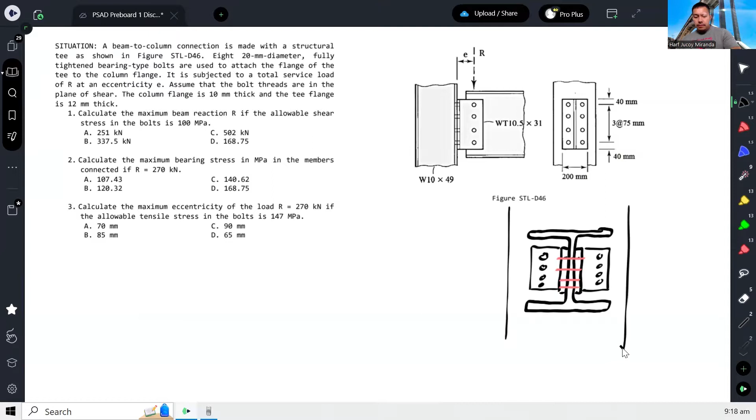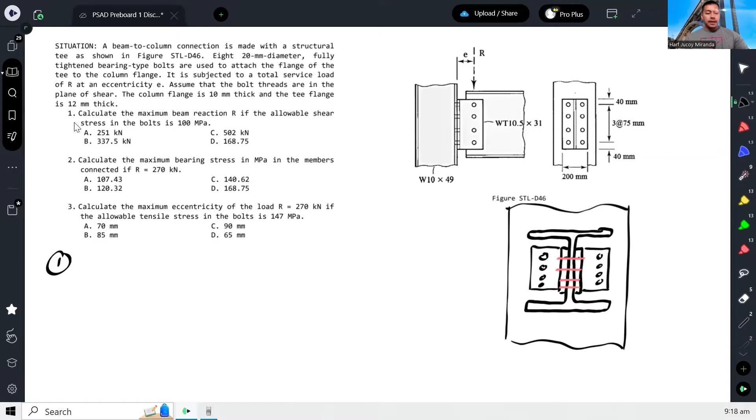Okay, so for number 1, calculate the maximum beam reaction R if the allowable shear stress in the bolts is 100 megapascal. So isn't shear stress equal to shear force over area? Okay, so in this case, because the applied reaction R is parallel to the direction of the bolts, it will just be R over A.

Our A is the area of the bolts, total area of the bolts. So in this case, we have 8 bolts. So 8 times pi over 4 times diameter 20 squared. Okay, so that's the diameter.

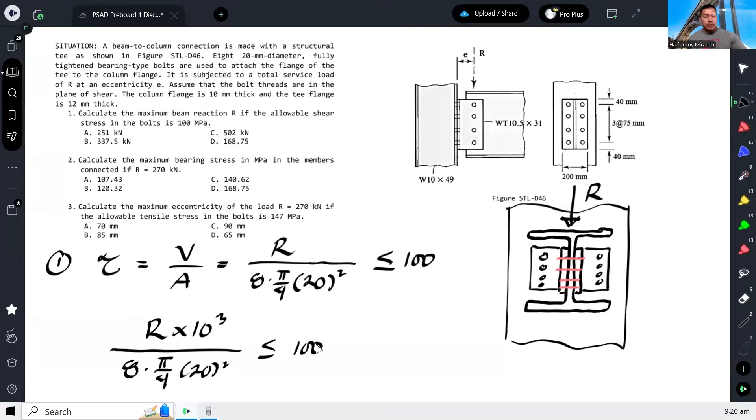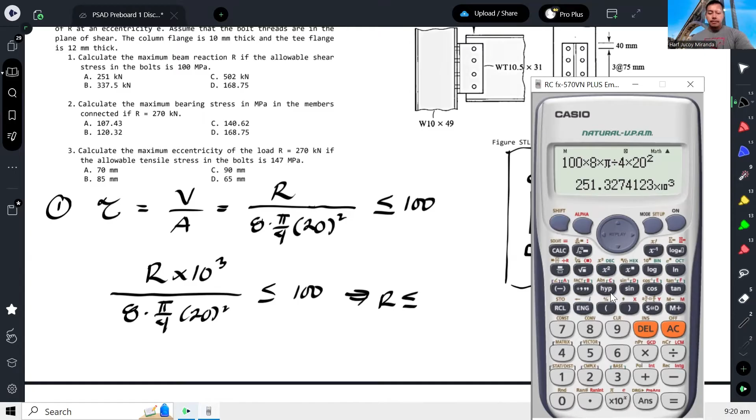Okay, so therefore, this should not exceed the allowable 100. So therefore, our R, we convert to Newtons assuming kilonewtons. And then we have 8 times pi over 4 times 20 squared should not exceed 100. So therefore, our R should not exceed... dividing by 1,000, we get 251.33. And that would be our answer here.

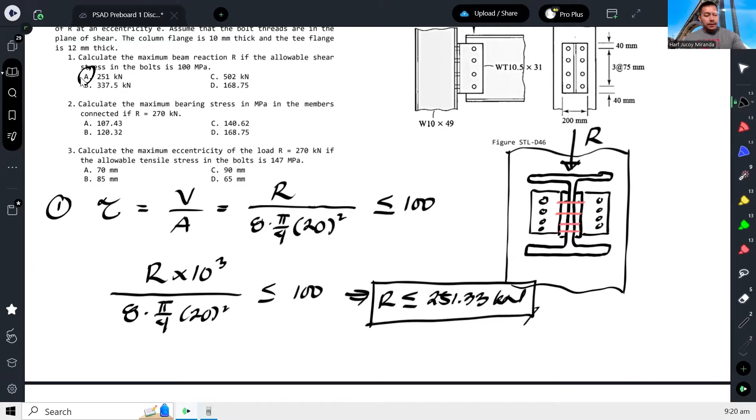Okay, next, calculate the maximum bearing stress in the members connected if R is equal to 270. So maximum bearing now. Okay, so bearing stress.

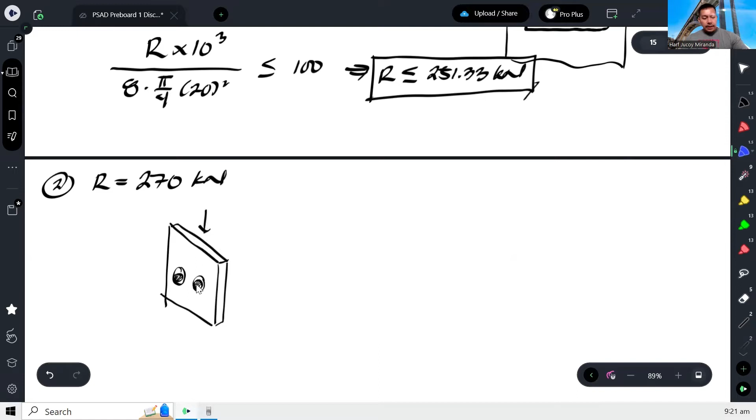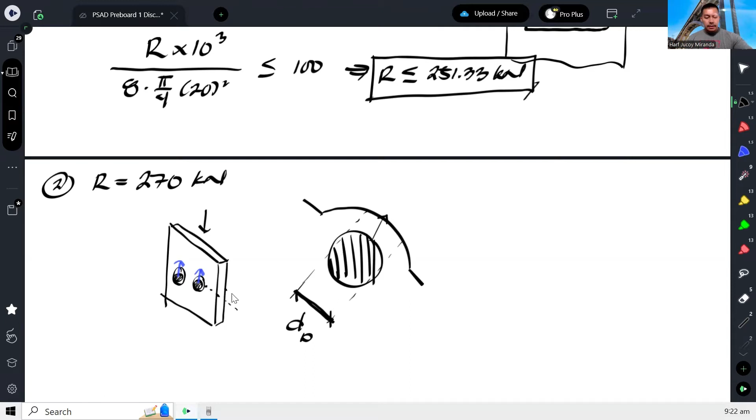It will hit there. Okay? So therefore, the projected area will be rectangular. Rectangular in the sense that this dimension will be the diameter of the bolt, and the vertical dimension will be the thickness. This is the thickness. So that means, the bearing area is always the diameter of the bolt times thickness. For bolted connections, bearing area is the diameter of the bolt times the thickness.

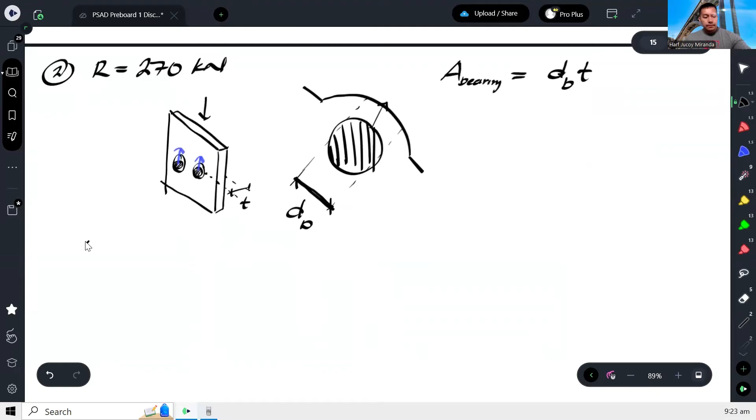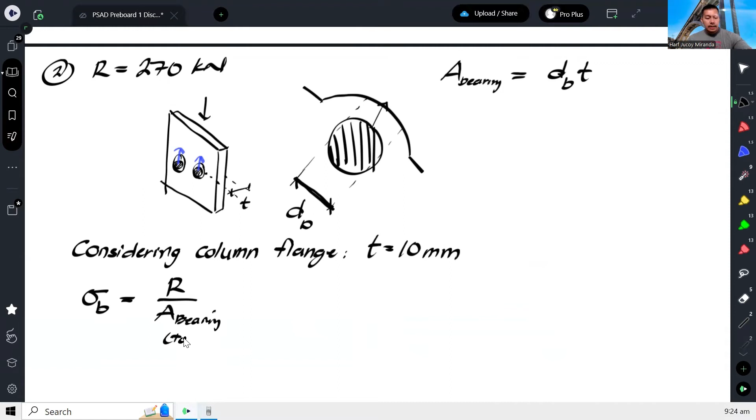Therefore, the bearing stress is equal to the reaction over the total bearing area. So that would be R, 270, converted to Newtons, over total bearing area, which is diameter of bolt 20, thickness 10, times 8 bolts. And that gives us 168.75 megapascals.

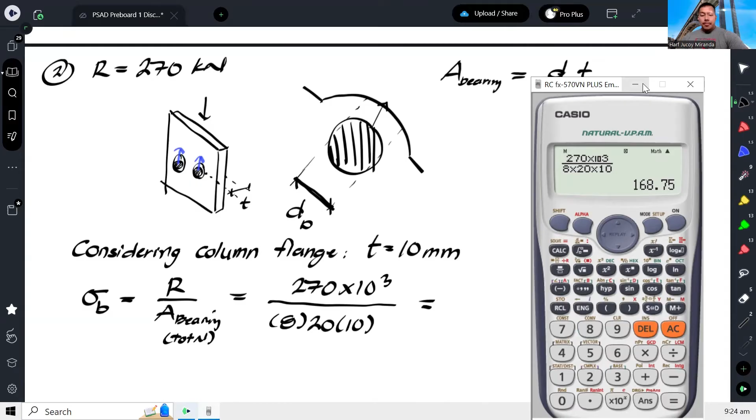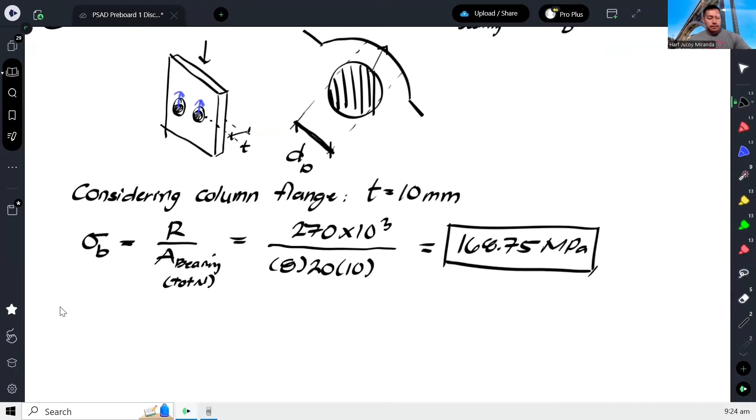Next, number 3. Calculate the maximum eccentricity if the allowable tensile stress in the bolts would be 147 megapascals.

So we're looking for tensile stress, trying to find the eccentricity. When there's eccentricity, it produces a moment. This moment causes the bolts to be subjected to normal stresses. With respect to their neutral axis, which I assume is in the middle, this side will be under tension and the bottom will be under compression. The stress diagram looks like this.

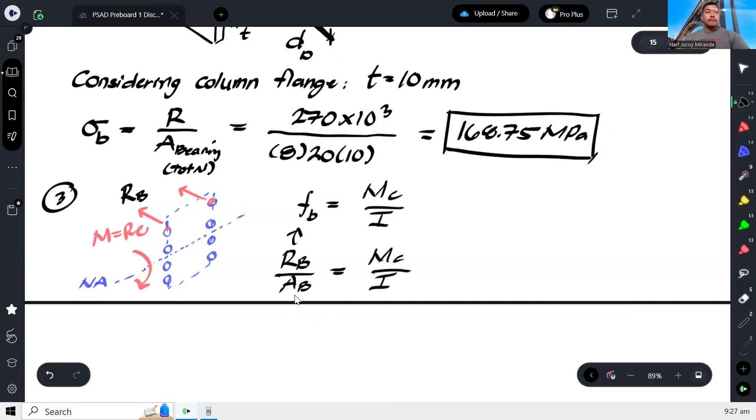This stress will also serve as the maximum tensile stress of the bolt. That's also what becomes the tensile stress of the bolt—once you get the reaction and divide it by the area, that's the stress. So therefore, we will set this not exceeding—what does the problem say? It can't exceed 147.

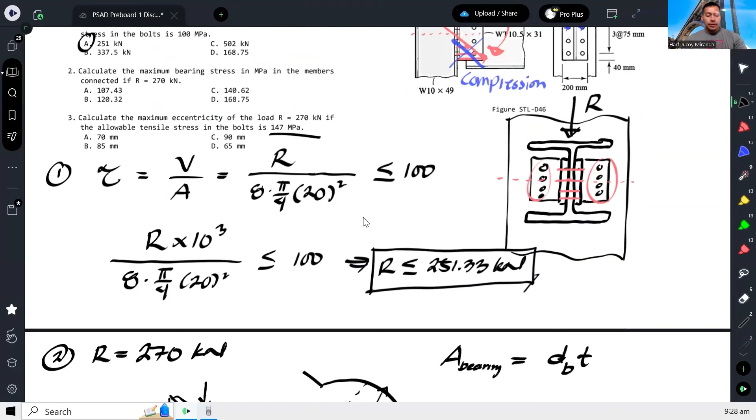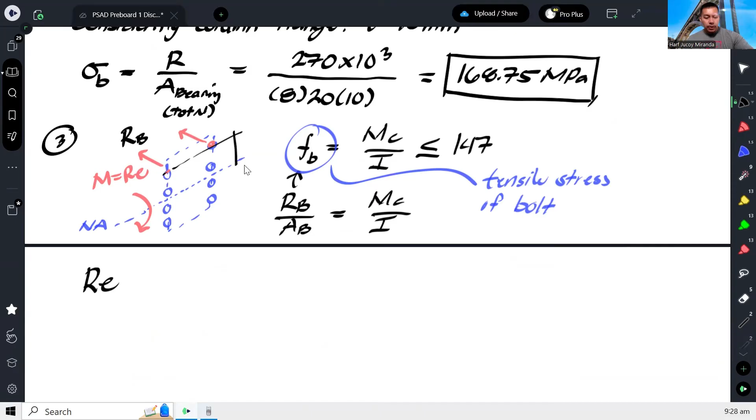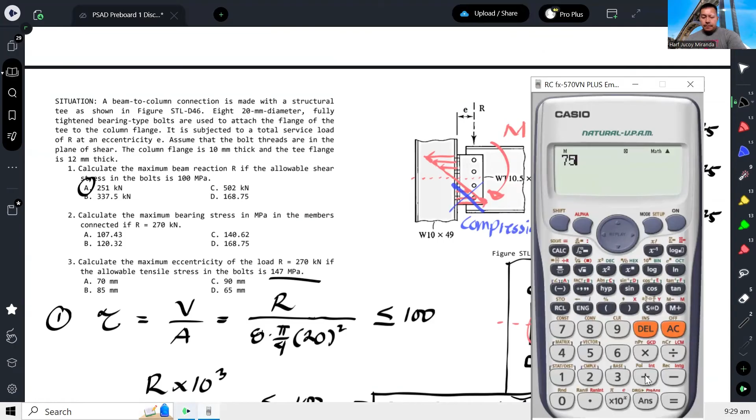So M is R times E. Our C, that's how far the bolt is from the neutral axis, is given in the problem. Let me enlarge this. The problem says this is 75 each way, and here's the neutral axis in the middle. So this distance is 75 plus half of 75, which is 112.5. So our C is 112.5.

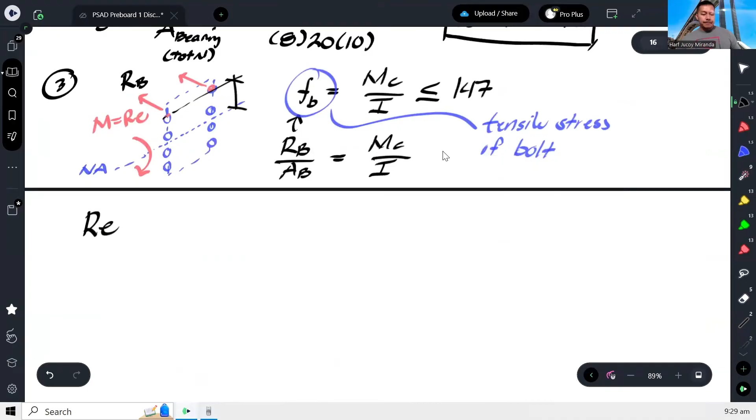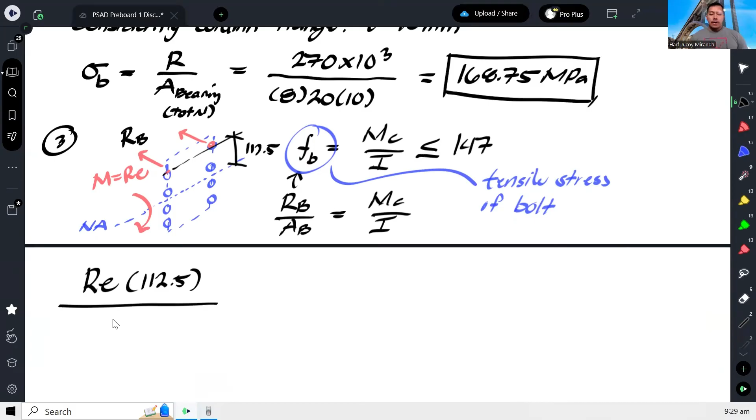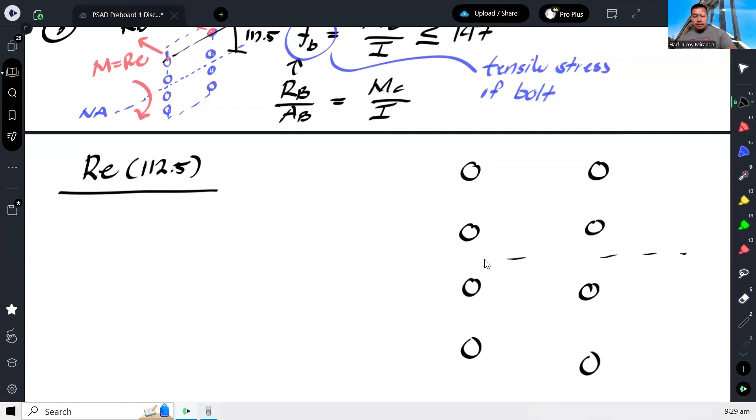Over I. Now for this I, when dealing with bolts—to get the moment of inertia about the x-axis, say this is the x-axis—it should be the summation of the moment of inertia about the centroidal axis plus AD squared. Remember the transfer formula, the parallel axis theorem.

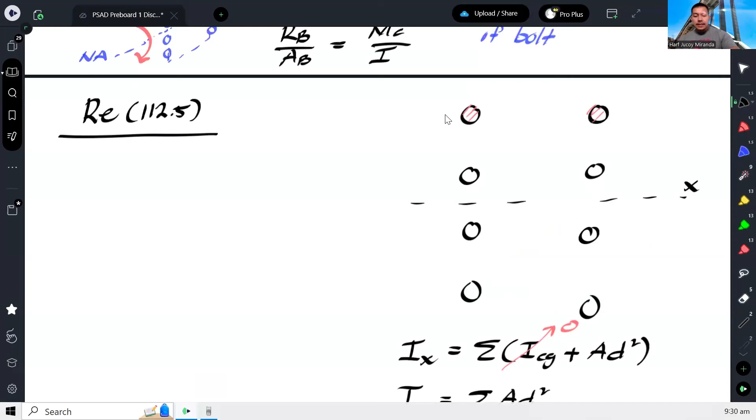So here are their distances: 112.5, and then this one I think is 37.5. So what happens here is it's just the summation of the area of the bolts times their distances squared, which should not exceed 147.

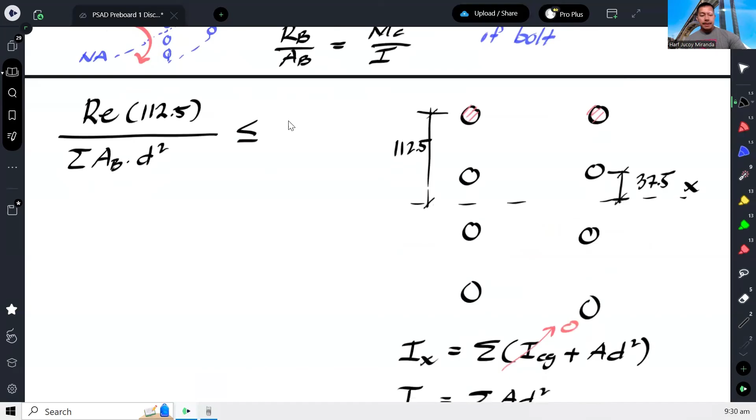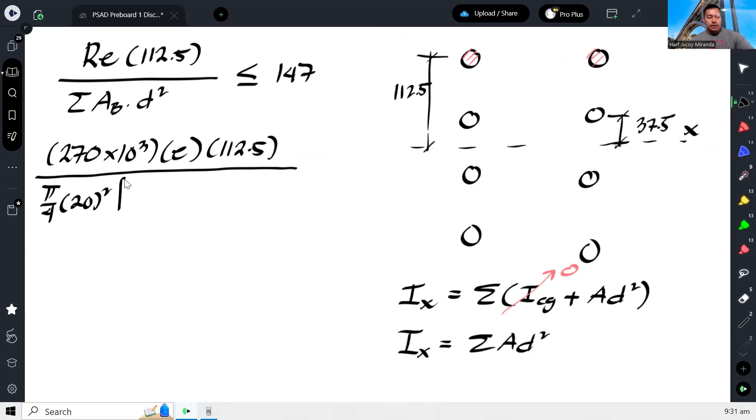The R is given, it is 270. So we have 270 kilonewtons times the eccentricity we're solving for, times 112.5, over the area of the bolts (pi over 4 times diameter 20 squared) times the sum of d squared terms: 112.5 squared, times 4 (since there are 4 of those), plus 37.5 squared, times 4 as well. And that should not exceed 147. From here, we should be able to calculate the maximum eccentricity.

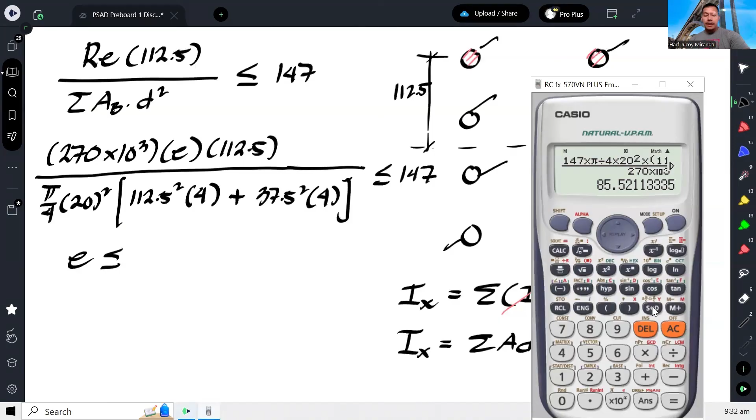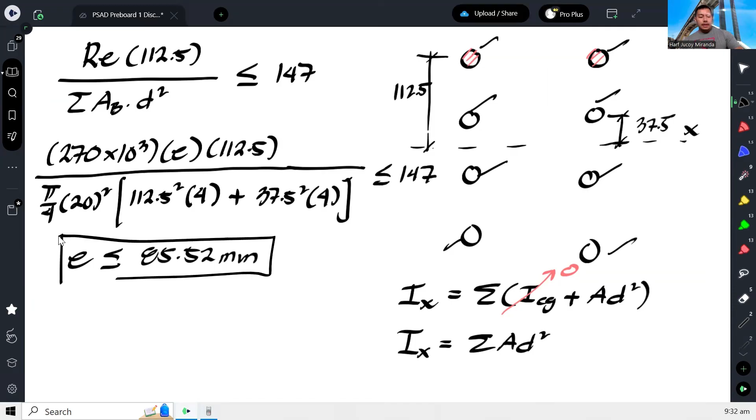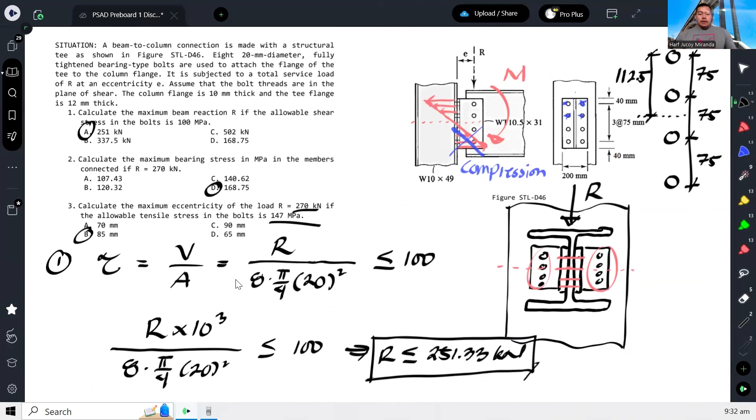So that gives us 85.52 millimeters. So our eccentricity should not exceed 85.5 mm. Looking at the choices, the best answer would be 85. And by the way, the answer to number 2 was 168.75. That's how we answer this problem.